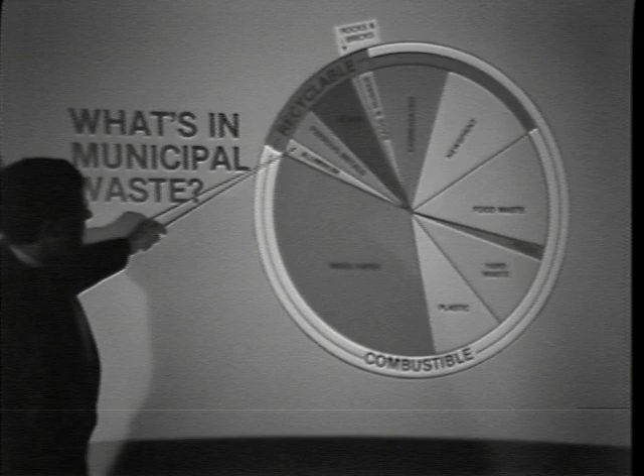Those parts of the waste stream which are recyclable, and those parts of the waste stream which are combustible. Recyclable, including aluminum, ferrous metals, glass, rags and rubbish, corrugated newsprint. These are traditional sources of recycling activities in this state particularly. And the preponderance of the waste stream is combustible.

This represents a sampling that we conducted for a 2-week period at the Edgeboro landfill, documented in our environmental impact statement. The significance of this slide is that it represents basically the same components of waste found throughout the world in other affluent countries. We hear a lot about my garbage is better than yours, yours is different from mine. It's all basically the same.

We find variations in moisture content. For example, Japan has more moist refuse, but at the same time they have more plastic in their refuse, perhaps 10 or 15%. It ranges. This happens to be about 7%, which is what we found in the constituent elements of the Edgeboro municipal waste stream.

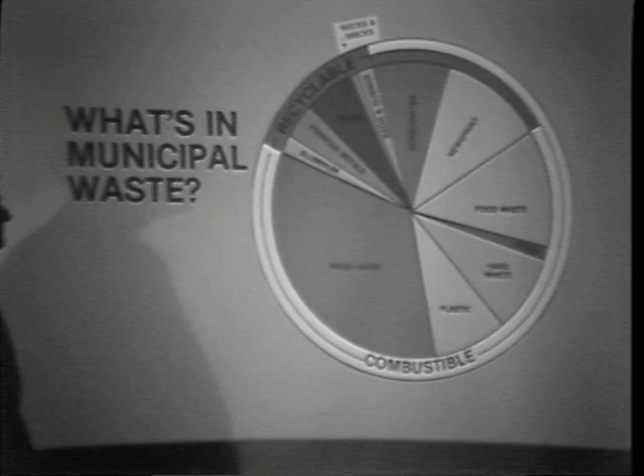Quickly touch upon the fact that the technology we're going to be talking about tonight is not experimental technology. It is widely adopted throughout the world, using the same basic commodity. This will give you an idea of the number of major countries that have adopted resource recovery technology like the one we're proposing for Middlesex County.

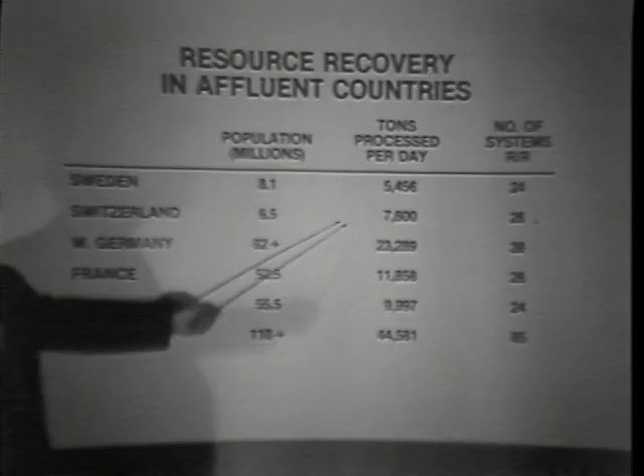Major countries like West Germany, where 23,000 tons per day in 39 plants are being used right now. That's equivalent to all the waste that New York City generates. Japan has 85 plants with a throughput of 44,000 tons per day, or roughly 3 times what the entire state of New Jersey generates per day. So the technology is not something that is untried.

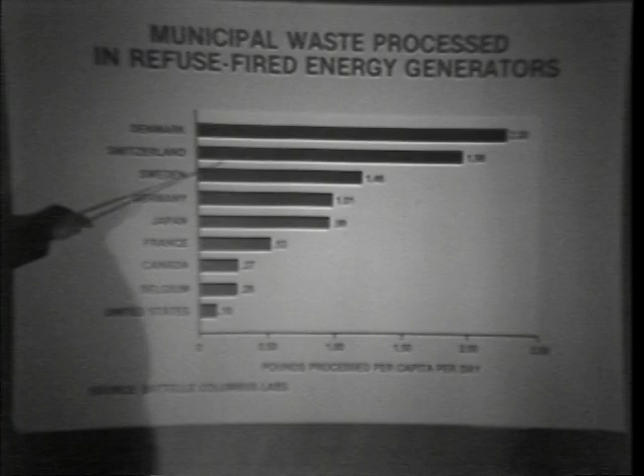This is how that throughput relates to a per capita waste generation. We normally consider a person as generating about 3 to 3.5 pounds of municipal solid waste per day. As you can see, these countries have achieved significant diversions from land disposal through the use of resource recovery technology. You got to get all the way down to the United States, where we're doing about 1/10 of a pound right now.

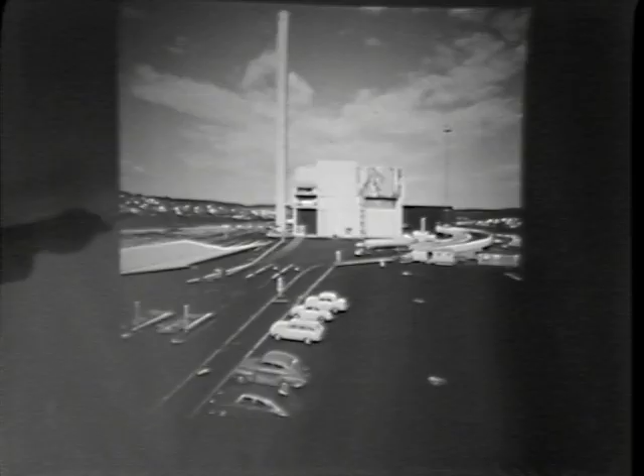I'll quickly go through. This is what the plants look like. This is a Swedish plant in Göteborg with a throughput of about 1,000 tons per day. This is a plant in Bremerhaven, Germany, which uses the latest technology, a scrubber, to perform acid gas control, and it is roughly 1,000 to 1,500 feet from the residential units.

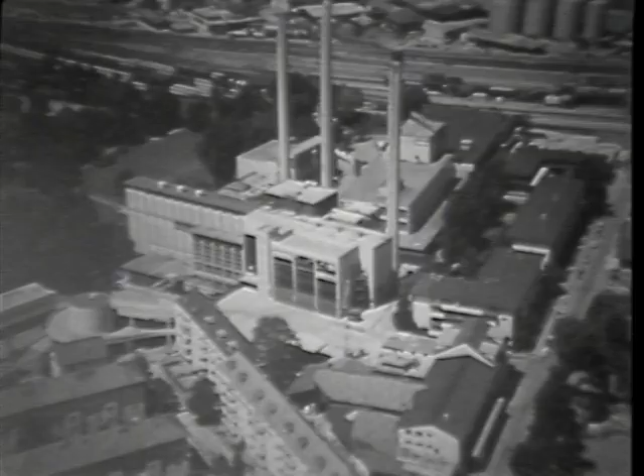A Japanese plant. The first of these plants ever to be built in the world, in Bern, Switzerland, capital of Switzerland, and as you can see, it's close in close confines to residential apartment uses, as well as some single-family townhouses.

The reality, from a worldwide perspective, is that people have recognized in Europe and Japan that we have limited land, that there are environmental concerns to be addressed with land disposal, and unlike us until recently, they are aware of the energy value in municipal solid waste. They have opted for an aggressive program of resource recovery and recycling.

In the United States, same basic parameters. This one is gaining more prominence locally, as landfills are forced to upgrade with environmental improvements and as capacity limitations are reached. We're facing the fact that we have to turn to alternatives.

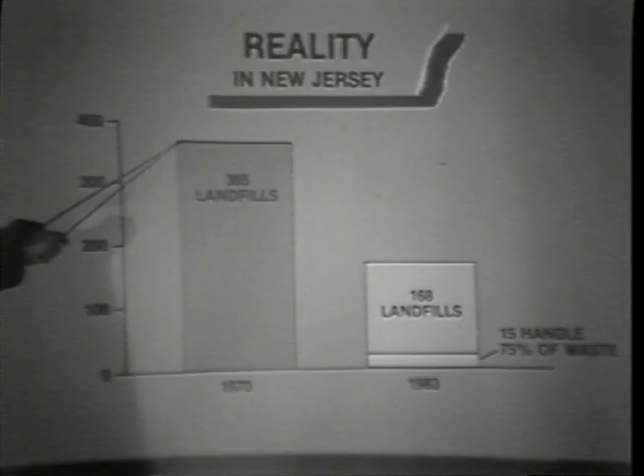This is the reality that faces New Jersey. In 1970, we had 365 landfills. In 1983, we have 168. But the key issue, or the key dimension, is the fact that we have 15 landfills in the state that handle 75% of the waste, and those landfills are rapidly reaching their limits of capacity.

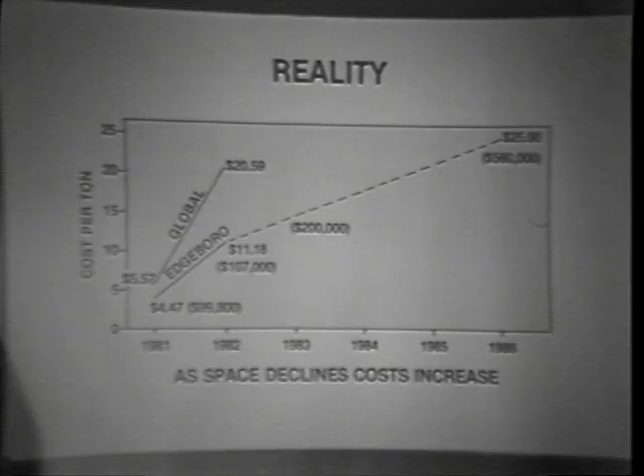This is a reality not many people are aware of, yet it represents a scenario that is not highly improbable. It shows that in 1986, if current trends continue, this county will be faced with the prospect of siting a new 135-acre landfill to satisfy its waste disposal needs to the year 2000. Those of us in Middlesex County tend to feel the luxury of having readily available land disposal. It's going to be here for a long time.

Why worry about it? The fact is that unless new landfills are opened in other counties, or landfills are expanded in the northern part of the state, this county will be without land disposal for its own county-generated household solid waste. There will be no disposal resources in the county by 1986.

What will be required to satisfy county-generated waste through the year 2000 is a plot of land equivalent to about 400 to 500 residential lots, buried about 40 feet deep. With resource recovery, the land requirements are dramatically decreased, in fact, to less than 1/7.

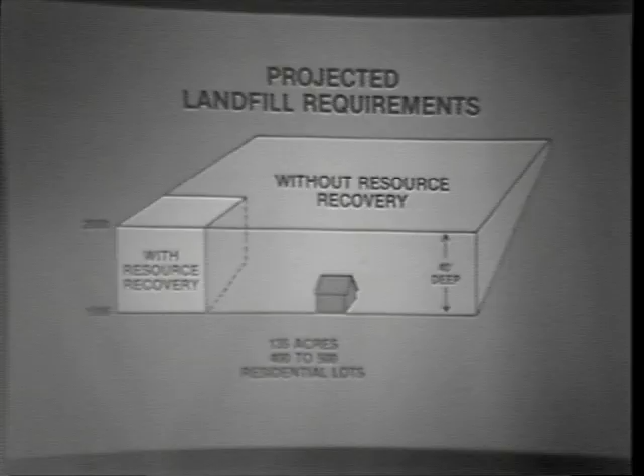The county, facing this prospect and analyzing the various scenarios in terms of waste disposal, the quantities coming in, and the inability of other exporting counties to solve their problems, has opted for a balanced approach to satisfy its own waste disposal needs. It features recycling, resource recovery, and landfill.

Recycling, basically curbside local recycling programs, is to be expanded from a present level of about 1.7% to a goal in 1984 of 5%, with an ultimate goal of recycling 25% of the municipal waste stream by 1990. A very aggressive goal, but this still leaves a significant portion of waste that must find a place for disposal.

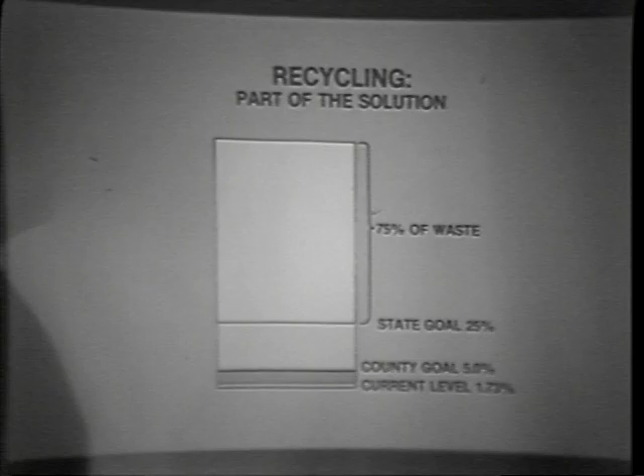The other part of the choice the county has made is resource recovery, for these reasons: first and foremost, bulk waste reduction, energy production, and environmental improvement. Let's look at what we mean by bulk waste reduction.

This is a cubic yard of municipal solid waste that would be carried on a packer truck. In an ordinary landfill, we can compress that through compaction to about 1/3 of its volume. By processing through a resource recovery plant, we reduce it to 1/20th of its volume, that being the ash that requires disposal.

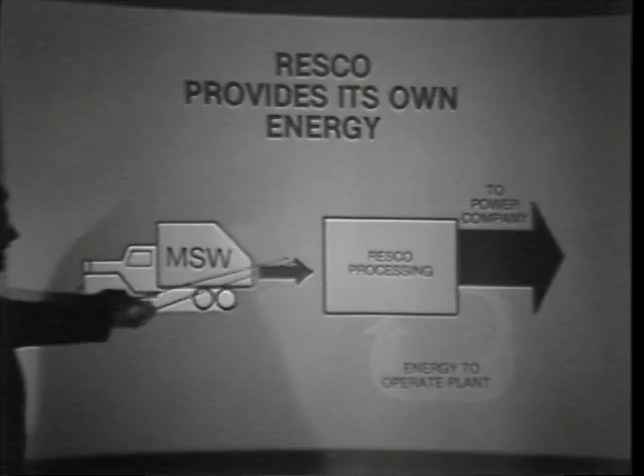We also extract considerable amounts of energy from the organic portion of the municipal solid waste stream. A plant such as proposed for East Brunswick, with 438,000 tons of throughput annually, will generate a gross power of 250 million kilowatt hours, the equivalent of 26 million gallons of oil. Very little of that energy is used for plant consumption.

In opting for resource recovery, there are three basic considerations: siting, technology, and financing. We responded as a company to the county's specifications in all three areas, contained in the county solid waste management plan, which was approved by the state. In terms of siting, the county prescribed an area called a gray area, basically in the central part of the county along the Raritan River, where it was deemed feasible for a resource recovery plant to be sited. Specific siting, however, was left to the project initiator.

Technology choices, again, were made the decision of the private developer. And finally, the financing responsibility, in view of the substantial tax benefits associated with financing these facilities and the benefits that form of financing bestows on the public in terms of tipping fees, was delegated to the private sector. We responded to those three criteria as follows.

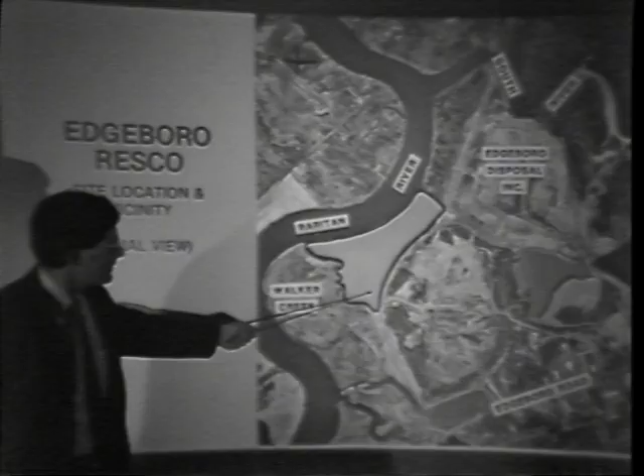We have looked at other technologies. Resource recovery is a generic term; it embraces many technologies. Many have been experimented with, particularly under the sponsorship of the federal government and the Resource Conservation Recovery Act. Many technologies have failed, many have proved unreliable. This technology has a track record of 30 years, and it's been improved over that period. That's why we have selected it for application in this state.

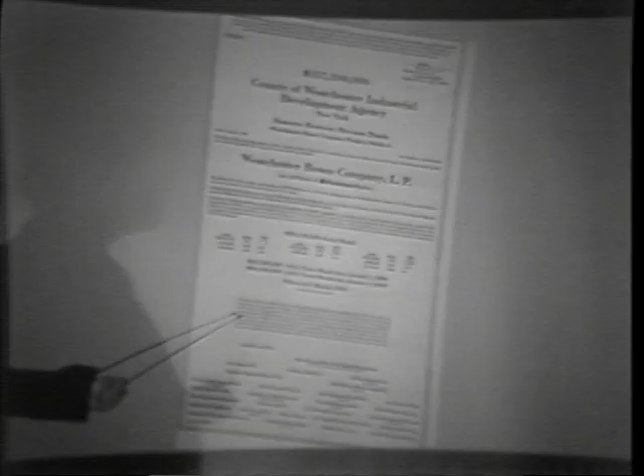I mentioned financing. The county's third decision was that these resource recovery projects are businesses. They're not public works projects, they're businesses, and they should be run as businesses. We have adopted that in our Saugus plant, have run these projects as private businesses, and we have continued that philosophy in Westchester County. That is the offering statement associated with the issuance of $157 million worth of tax-exempt industrial development bonds, which represent about 75% of the capital cost of a project being built in Peekskill, New York.

Wheelabrator Frye is the managing partner through a subsidiary in joint venture with the John Hancock Insurance Company. We both put in equity, we both have made a long-term commitment, and we both are standing behind the design and construction of that plant. It is again 50% larger than the proposed East Brunswick plant, and it will serve the waste disposal needs of Westchester County.

I touched upon Baltimore, where we are dismantling the pyrolysis project. We placed these bonds, $190 million worth of tax-exempt bonds, two weeks ago. That project has been under demolition for about a month and a half now. It will be completed in 1985, and it will serve the waste disposal needs of the city of Baltimore and parts of Baltimore County. We have undertaken the responsibility to design, construct, own, and operate the plant, and in that case have committed over $50 million worth of equity capital to the venture.

So in the past six months, Wheelabrator Frye has committed over $100 million to the construction of resource recovery plants. We have faith in the technology, we have faith in our ability to run these plants and to benefit the communities that they serve.

Which leads me to the final point I'd like to make before turning over the program to our technical consultants: the issue of community benefits.

These are the types of things associated with a privately developed project, and how a RESCO project would benefit a town like East Brunswick. We believe it will provide a substantial rateable, perhaps nearly the largest rateable in the township.

Since the project is basically capital intensive, our costs are fixed up front, we believe that tipping fee stability, unlike what is happening with landfill tipping fees, will be stable. I can cite as an example our Saugus plant, where in 1975 we opened up with a tipping fee of $13 a ton, and we currently charge municipal customers, according to a contract,

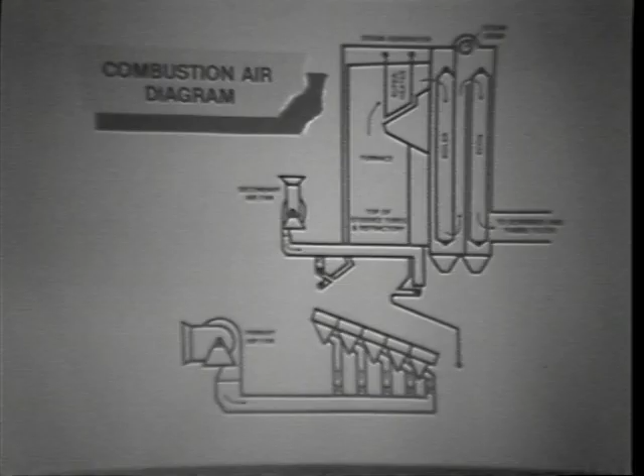I'd like to now concentrate on the processing side of our plant. Other technologies have used shredding and pyrolysis. The only processing we do is to pick it up out of that pit and drop it into the furnace. We do no processing other than to remove bulk, non-combustible material that's obvious inside the pit, and we take that out. I'd like to spend some time on both the lower part.

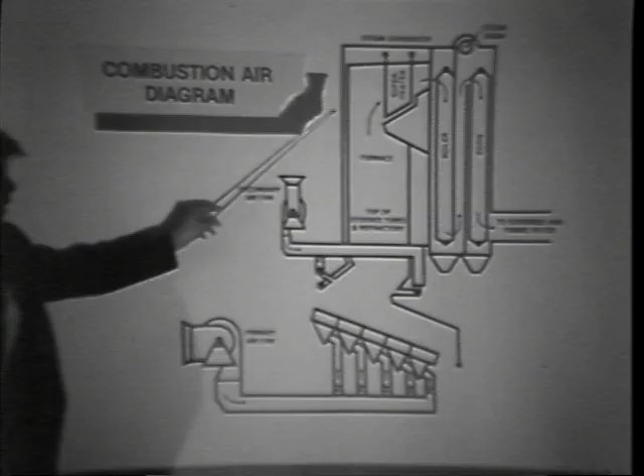This object down here is called a stoker or a grate, which controls the flow of refuse into the furnace. And this is basically the boiler, composed of both a furnace and heat transfer sections.

Combustion air would come through these hoppers underneath the grate to provide sufficient oxygen for the burning of the refuse. In the first zone, we call it the drying zone, the raw refuse is first exposed to the furnace, and any residual moisture is driven off and combustion is initiated.

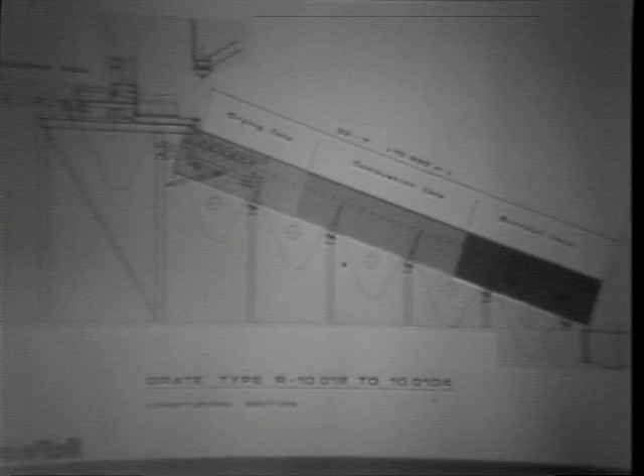The last section, the burnout zone, is basically not too exciting. There's some stubborn material in there that needs a longer period of time to burn, some wood, some tree stumps, logs, that type of stuff. Once it passes through that zone, it is discharged off the end of the grate, any of the non-combustible portion, into the ash quench system. Typically, it takes 45 minutes to an hour for refuse to travel from the beginning to the end.

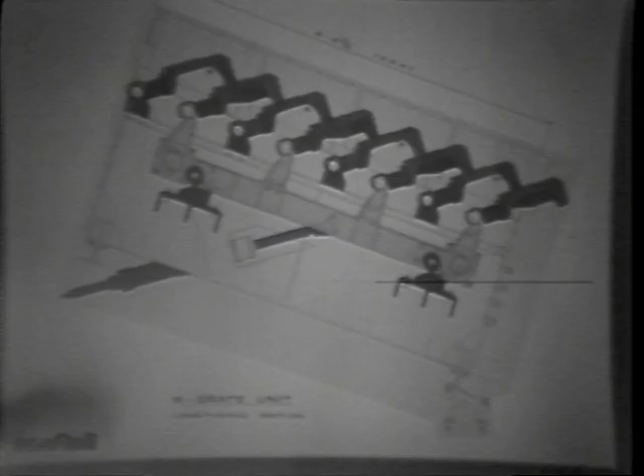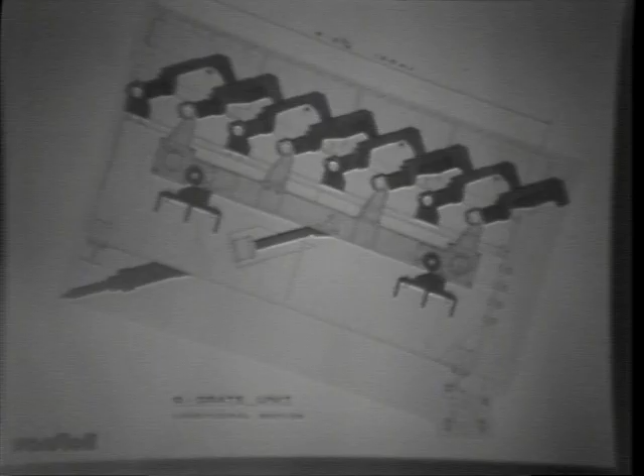Not to bore you with details, but this is a close-up of the grate to give you a better idea of just what's taking place there. The grate is comprised of alternating rows of stationary and reciprocating grate blocks. This chassis drives every other row, and essentially this block would move back and forth, slowly agitating and moving the refuse down the grate. It provides a very uniform movement and control over the fuel and the air through the grate to provide for the best way we know to control combustion in a very heterogeneous material.

This is a close-up of the boiler itself. The grate, which we just went over, is the lower part here, which shows the hoppers and the grate. And to really speak about the boiler, you have to look at it in two ways. One is the combustion side, and the other is the water side, the steam side.

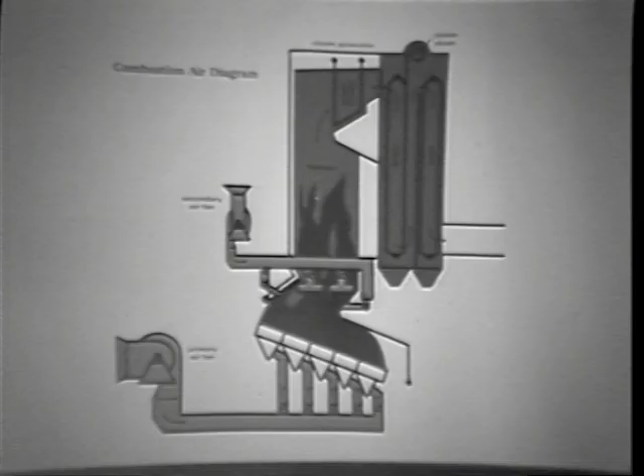To talk about combustion, you really have to go back to the three fundamental principles of combustion. They're called the 3 T's: time, temperature, and turbulence. All those have a special application in burning refuse. Time - you need sufficient time in a furnace to be sure that all the material is burned. You've got to give time to the combustible portion to mix with the oxygen so that everything is burned and combustion is complete. We do this in several ways.

Basically, we initiate combustion on the grate by providing a great deal of air underneath the refuse. This air, again, is taken from the pit. Odors and dust are sucked in and injected into the furnace for the initial combustion. As the combustion begins and the material heats up, a great deal of gases are given off. Those gases have to be burned. A bulk of the combustion then takes place above the grate.

To accommodate this, we have a secondary air system, a system of very unique nozzles and arches that provide the turbulence necessary to complete combustion. The gases are induced into a very violent motion, a recirculation of gases to be sure that oxygen is available to any material that has to be burned.

And finally, the great deal of gas and heat released in this area essentially forms a constant ball of fire that sits above the grate at all times. This radiant beam of heat serves to roast and maintain complete combustion of the material in the grate, as well as to combust any of the gases given off during the combustion process.

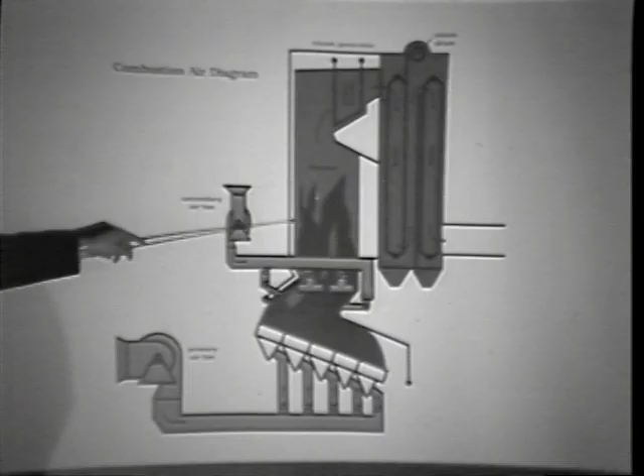The fire is basically complete by the time it leaves the furnace, and the heat absorbed in the furnace and the various sections inside the tubes is then used to generate the steam.

Briefly, the water enters the boiler in the cold side, is sent up to the steam drum, and by proximity to the heat through tubes, the water is turned into steam. The steam is then sent to the turbine generator for generation of electricity.

At one time, incinerators were very common in the United States. Their basic function was strictly to reduce the volume of the material entering the incinerator. We have a much bigger role in that we're trying to extract every bit of heat we can, to recover it and turn that heat into steam for generation of electricity.

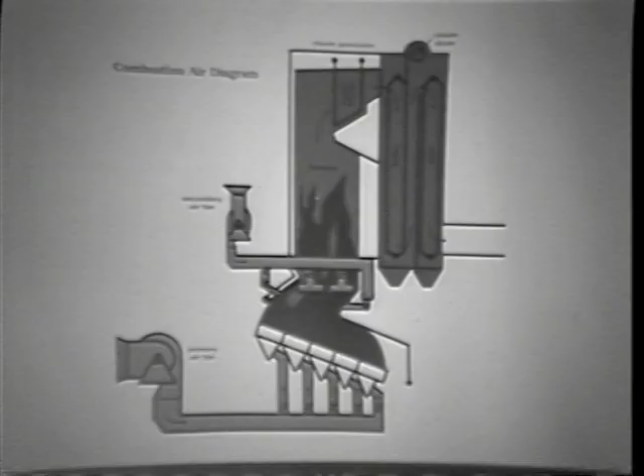Finally, in a little more detail, as the gases leave the boiler, they now have to be cleaned up in the air pollution control side of the system.

As it passes into the spray dryer absorber, a mixture of water and soda ash is injected into the flue gas stream. This serves to absorb any of the acid gases contained in the flue gas stream, and the reaction products, as well as any entrained particulate matter inside the flue gas from combustion, is then conveyed to the fabric filter.

We have representatives from our Air Pollution Control Division here, and they'll go into great detail over this particular system we've applied here to give you a better feel of how it works.

Essentially, we have 62.5 tons per hour entering the furnace, and roughly 20%, or 13 tons per hour, is non-combustible and falls off the bottom part of the grate. A smaller amount, essentially 3 tons per hour, results from the fly ash and reaction products in the spray dryer, and is then all combined for ultimate removal to the landfill in trucks.

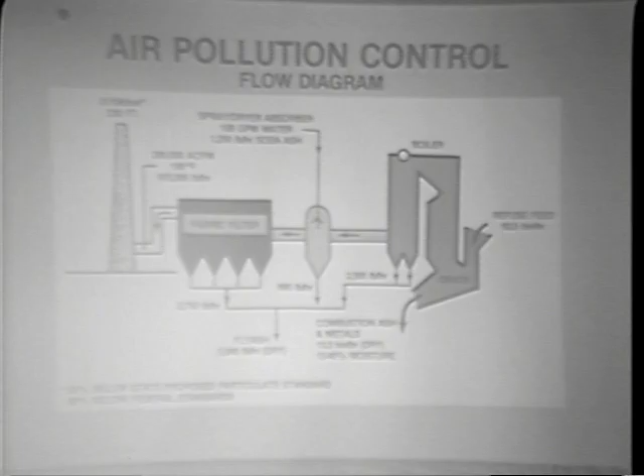I think that's it. Mr. Ferrante, I think this is a good time to take just a 1 or 2 minute break while the videotape is changed. Want to do that now?

All right, would you be seated, please, so that we can continue with the presentation? We'd like to continue, please. Would you be seated? There's something wrong with the mic. You can have my pencil if you like. Thank you. Get him up here. Okay.

As I mentioned at the outset, the commitment that we make to resource recovery is not just to design and finance it, but to operate it, and operate it for a long period of time.

I always have a great deal of pleasure introducing Dan Madigan, because Dan has been with the RESCO project in Saugus since its groundbreaking. He has a wide background in industrial power plant operation and came to RESCO to tame that beast. He's been with us since 1973. He's the key figure in the success of our Saugus operation, and I thought he could come down here and share some of his experiences briefly in what it's like to operate a refuse plant and the kinds of commitments necessary to make it work. Dan?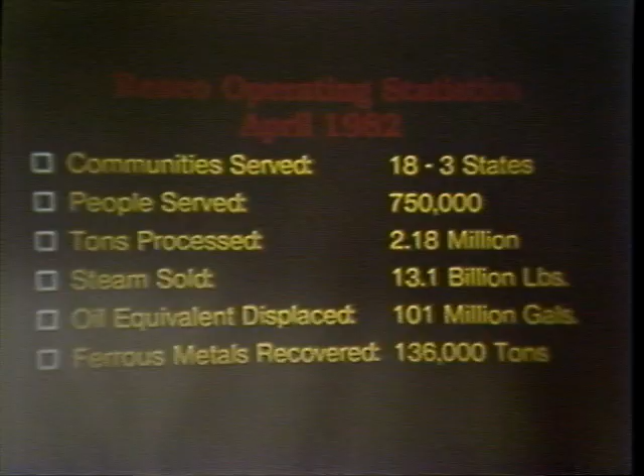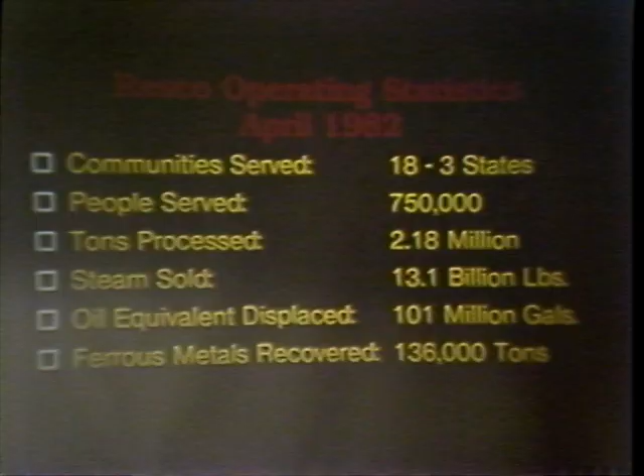These figures are old. The 2.5 million is as of January 1st this year. Steam sold is now 15.2 billion pounds to the customer. Oil equivalent, that's in gallons, but in barrels that would be about 2.75 million. Ferrous metals, that is the actual number, and it hasn't changed very much, to be perfectly honest with you, because the metal market has been pretty bad in our present economy. Very little movement in the last 18 months, only marginal sales in that area.

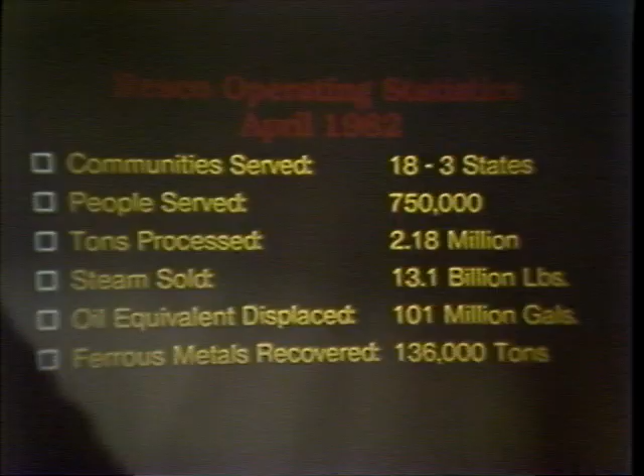In talking about the people in the plant, I'd also like to add that what Wheelabrator has, and what we have as a company, is 8 years of operating experience with our own name on the front door. We were responsible for the design, the construction, and the operation. So therefore, we can't say, well, we did a good job building the place, they just didn't know how to run it. If it's not run properly, it's our fault, no one else's. And I think we can offer that, and with that, we can offer you experienced people, people that are available, that understand the business, and will make great contributions to any future endeavors that we undertake.

Right to the point that every one of our employees is involved on a regular basis in technical updates, month-to-month operating needs. Any inputs that any employee has, regardless of his position in the company, are asked for, recorded, documented, and his assistance is also used in the implementation of things that we accept as changes to the design and improvements in efficiency.

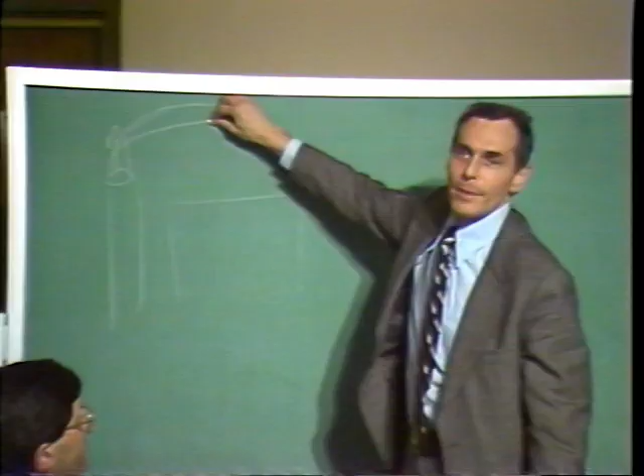In addition, if you have a situation where there's a building near the plume, as is the case here, this model also describes the effect of what we call building downwash, where turbulent air currents around the building will cause parts of the plume possibly to be sucked downward. So this is a very sophisticated model.

Before I discuss the results of the modeling, I just want to briefly explain the effects of the three control technologies that we considered. Some of these have been touched on already, but I just want to put it in perspective.

The purpose of the precipitator or the fabric filter is to essentially eliminate the emission of particles from the stack. These are the kinds of particles that would cause a plume to appear brown or black when it comes out of the stack. This kind of thing is definitely illegal in New Jersey, and you just don't see plumes like that around anymore.

All of the scenarios that we looked at employ either electrostatic precipitators or fabric filters. The purpose of the wet scrubber or spray dryer absorber is to reduce the emission of acid gases, principally hydrogen chloride, hydrogen fluoride, and various oxides of sulfur.

Both types of scrubbers, the wet scrubber and the spray dryer absorber, produce about the same amount of scrubbing action. They reduce the hydrogen chloride and hydrogen fluoride emissions by a factor of 10, and they reduce the oxides of sulfur emissions by a factor of about 3.33. The emissions of other pollutants are essentially unaffected by the scrubbers. The scrubbers have other effects, though, besides cutting out the acid gases.

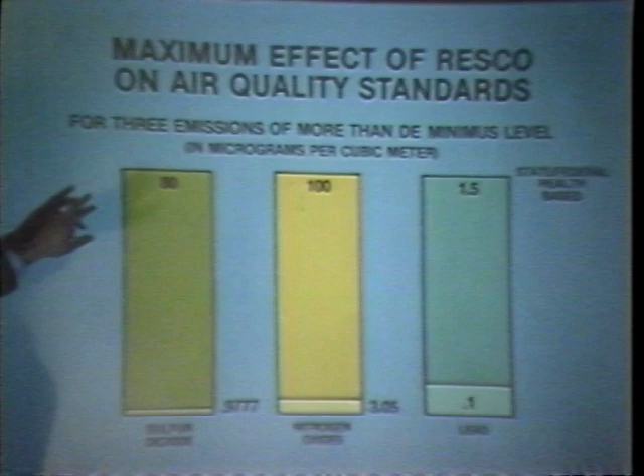The three most significant emissions in terms of their impact on the standards are sulfur dioxide, oxides of nitrogen, and lead. This slide graphically shows how the concentrations would relate to the standards. These would be the maximum ground level concentrations that would be produced by the RESCO plant, compared against the standards. I emphasize these are the maximum ground level concentrations that would be observed anywhere — everywhere else the concentrations would be even lower. The federal and state standards are couched in different terms for different pollutants: for sulfur dioxide and nitrogen oxides we look at an annual standard, and for lead we look at a 3-month standard.

The emissions of other pollutants and their ground level concentrations, which I haven't mentioned here, would be even less significant than these in terms of impact — these are the 3 most significant ones. To summarize, based on the BACT analysis, we've ascertained that the facility operated with a 230-foot stack in conjunction with a spray dryer absorber and fabric filter would operate well within all existing health-based pollutant standards. Thank you.

To complement Professor Reese's examination of the effect that the proposed facility would have on air quality, we asked other technical advisors to look at other environmental issues associated with the plant. We asked Ware & Engineering, who coordinated the environmental impact effort, to look at the site geology, water consumption, ash disposal, traffic, and the use of the river as a condenser cooling water medium. I want to introduce from Ware & Engineering Dennis Fenn, their Senior Vice President, who was in charge of that effort. Dennis?

Thank you, Joe. As was previously stated, our role in the project was to focus on the preparation and completion of the environmental impact statement. This involved not only our in-house studies on various aspects of the project, but working very closely with the technical engineering staff at Wheelabrator Frye, as well as with Professor Reese relative to the air pollution control technologies.

First, relative to the siting of the facility on the Edgeboro property, we had several criteria in mind. Here we see a geologic cross-section through the facility area. This cut runs north and south, perpendicular to the river, with the so-called Clancy's Island to the left on the slide, which is a higher topographical area, into a lower topography area, which is virgin ground, back up onto previously landfilled area, and beyond the edge of the slide would be the Raritan River.

The physical plant location is in this general area on the lower topo existing ground. Basically, of key concern in orienting the plant here was distance to a bedrock formation which would serve as a bearing soil for the foundations, because it is a major structure, as well as having heavy equipment.

Secondarily, considering a potential effect on groundwaters, the physical plant itself really does not have any effect on groundwaters. As was previously described by Mark Hepp, it is literally an industrial plant. The surrounding areas are paved. All the handling and manipulation of refuse itself occurs within the confines of a building, on top of structural concrete and sealed tipping floors and pits. So there's really no leachate potential from the physical plant itself.

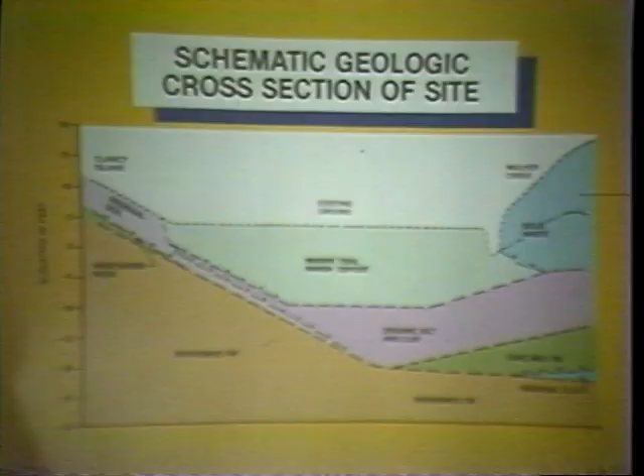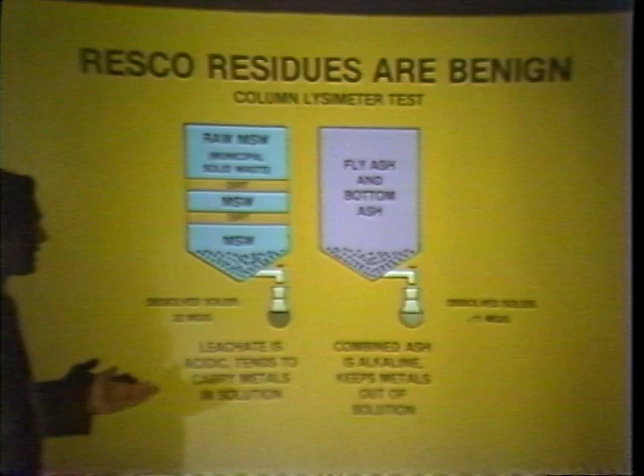Relative to the potential leachates from the residue of the Resco plant itself, this slide depicts a comparison between a leachate from a raw municipal solid waste as it would be disposed of in a sanitary landfill, and a leachate from an ash from a Resco facility. As many of you are probably familiar, raw municipal landfill waste, by its very nature and by the nature of a landfill operation, produces leachate. It's a fact of life. That's the motive for a lot of the environmental regulations landfills are facing today. It's been well documented in the literature that landfill leachates tend to be acidic and tend to carry metals and other contaminants in solution.

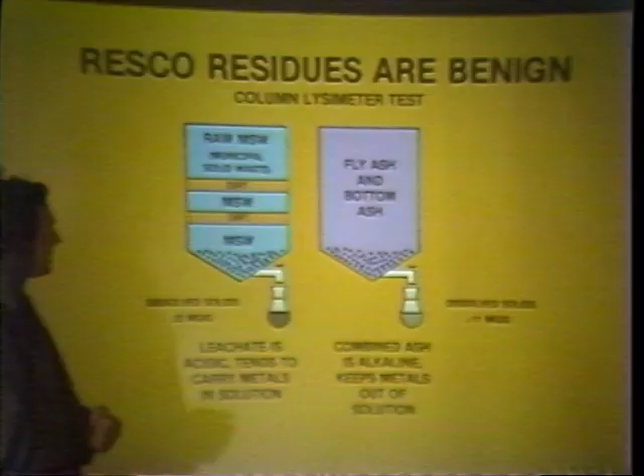In the case of the Edgeboro Sanitary Landfill, they are controlling that with their leachate collection system. The ash from the Resco facility is typically alkaline, and in the case of the proposed Edgeboro plant, it will be even more alkaline with the use of the soda ash spray dryer air pollution control equipment, which raises the alkalinity, thereby tending to keep metals and other contaminants in a less soluble condition. Although it does create a leachate, it's a less harmful leachate than you would find in a raw municipal solid waste leachate. The conclusion being that the leachate control system in the Edgeboro Sanitary Landfill would be more than adequate for our leachate.

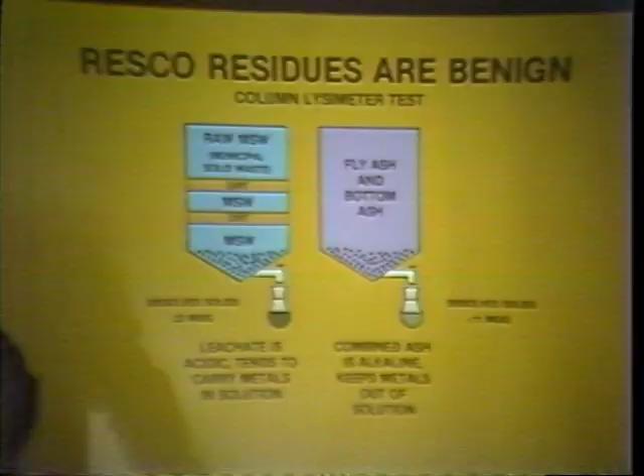What about other water requirements at the facility? The process requires other waters besides the Raritan River cooling water system, which will be described in a little more detail in a moment.

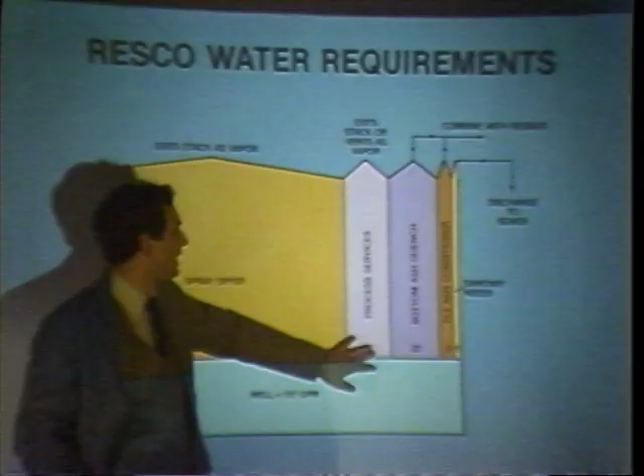These waters include the water necessary for the operation of the spray dryer itself, which represents, as you can see on this graph, a large portion of these other process waters, roughly 70%. It will use roughly in the neighborhood of 108 gallons per minute of water. The discharge from this is basically through the stack as vapor. There are other less significant water uses in terms of process services, such as boiler blowdown and other miscellaneous uses in the plant, representing about 22 gallons per minute, also exiting the stack as vapor.

The bottom ash quench waters exit the plant basically in the residue. There are also some very minor uses for fly ash conditioner and the basic sanitary needs of the employees in the facility, which would be discharged to the municipal sewer system. Those represent roughly a total of 4 gallons per minute, a very small amount. This total process water need would reflect approximately 157 gallons per minute, or about 220,000 gallons per day, and would be drawn from the on-site well at the Edgeboro landfill, which has a permitted capacity of well over 7 times that amount.

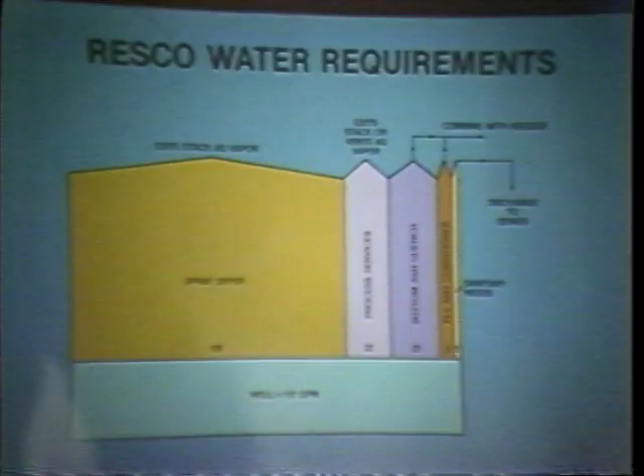Now we want to get into the other two impacts, that being traffic, focusing on the analysis we conducted at the intersection of Edgeboro Road with Route 18 and Old Bridge Turnpike, and the thermal water diffusion system in the Raritan River used for cooling the condenser. I'd like to introduce Gary McEntee from our office, who has served as senior scientist and manager of those studies, for a brief explanation of the same.

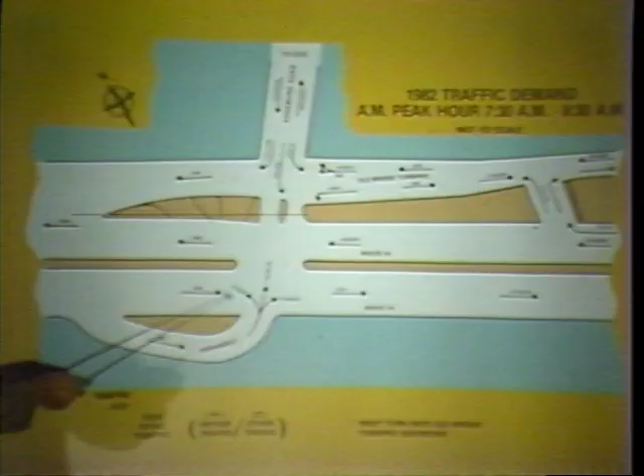What is existing as far as roadway conditions? First of all, we look at roadway geometrics, measuring the size of the various access points to the facility. The other thing we want to look at is existing traffic along that roadway system. In doing that, we undergo a technical study of the various turning movements through each of these access alternatives to the facility, locating the turning movements of other vehicles through this intersection. The first one would be cars, refuse vehicles, and then trucks in general.

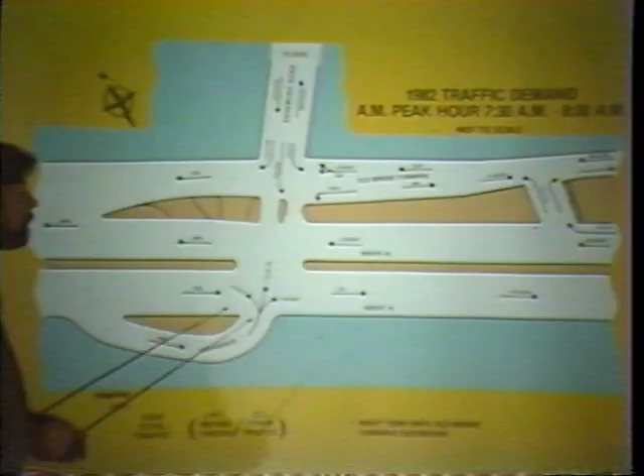Once that has been completed, we look for the peak hour that vehicles will be going through this intersection. In determining the peak hour, we can then do a capacity analysis. In looking at our study, we've determined that the peak hour traffic flow through this intersection is between 7:30 and 8:30 in the morning. There's also a corresponding peak hour in the evening between 4:45 and 5:45. However, for our analysis of this facility, we're mostly concerned with the AM peak hour.

Looking at this peak hour, through this intersection there are 4,800 vehicles that actually move through between Edgeboro Road and Route 18. Of those 4,800 vehicles, approximately 93 are refuse vehicles presently going into the site. We must remember that of those 93 vehicles, there are actually only approximately 47 vehicles being counted, but we're counting vehicles entering the facility as well as exiting. That 93 vehicle trips represents only 2% of the total traffic moving through this intersection.

So during the peak hour, which is the most critical hour in assessing safety analysis and capacity of an intersection, we only have 2% of that vehicle traffic being refuse trucks right now. This low amount of refuse trucks coming through the intersection is quite typical of solid waste facilities in general.

Basically, at any solid waste facility, whether it's a landfill or resource recovery facility, you have three peak hours of delivery of refuse to the facility. We have a very early morning peak between 6 and 7 o'clock in the morning, a late morning peak between 10:30 and 11:30, and then an early afternoon peak probably between 1:30 and 3 o'clock.

This roadway system was evaluated in 1985 by growing up projected traffic along this roadway. Taking those numbers, we have superimposed the amount of refuse vehicles that enter the facility. We have the same type of distribution, where refuse vehicles will be entering early in the morning, again later in the morning, and then early afternoon, showing the same type of pattern.

This shows that the actual refuse vehicles entering the facility do not have a major impact on peak hour turning movements. The other study of much concern that was addressed was the cooling water study, which we'll turn to now.

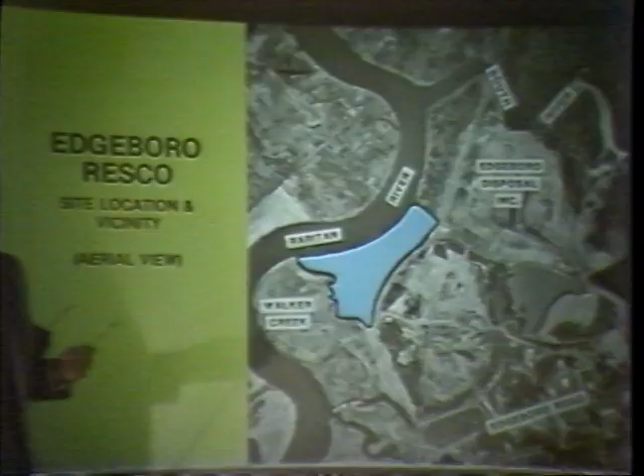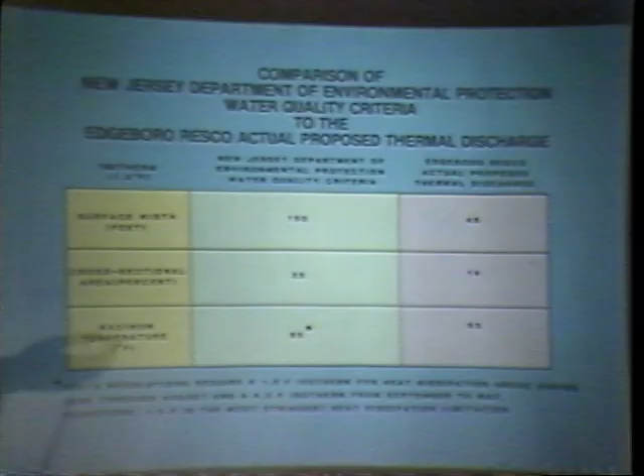Once looking at a once-through cooling system, one major concern is evaluating the criteria set forth by the New Jersey Department of Environmental Protection. Before the once-through cooling system was decided upon, we looked at various alternatives for cooling water use. In the earlier submission, we looked at four different alternatives: a cooling tower, spray cooling, a cooling pond, and once-through cooling. Based on comments from the county and the state, once-through cooling was the most feasible, both economically and environmentally.

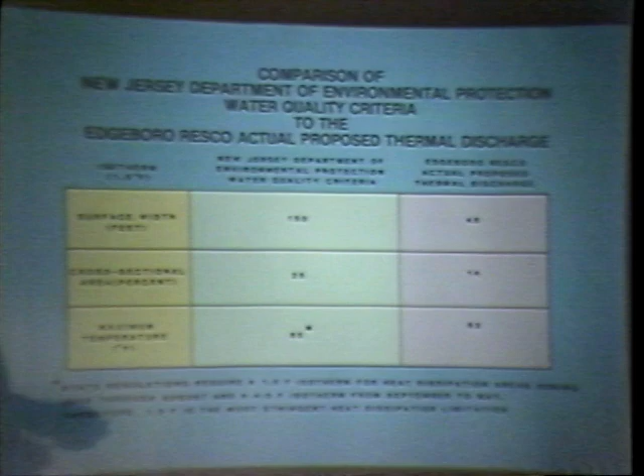Once we decided to use once-through cooling, we met with the New Jersey Department of Environmental Protection to review their regulations and the type of model we were going to use to assess this potential environmental concern, as well as to ask for input on data and other facilities discharging into the waterways. Sitting with them and presenting our model, they felt confident it would give them the results they were looking for and provide an adequate evaluation of the concerns.

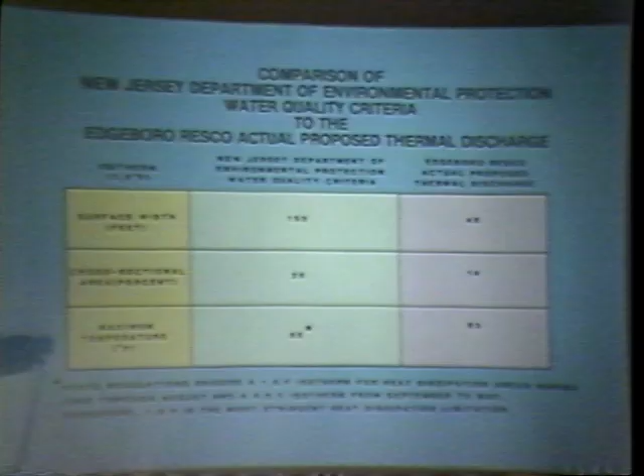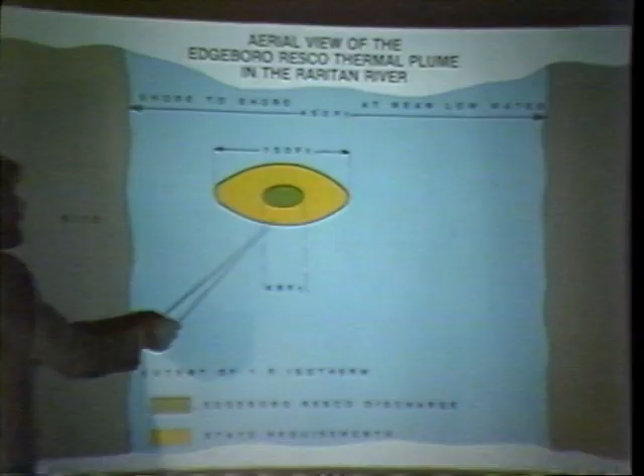New Jersey has regulations limiting what's referred to as the mixing zone for thermal discharges. The mixing zone is the area the state has set up, 150 feet across, where mixing of the discharged water is allowed. At no point can the water outside that zone be increased more than 1.5 degrees Fahrenheit. It's a fairly stringent regulation.

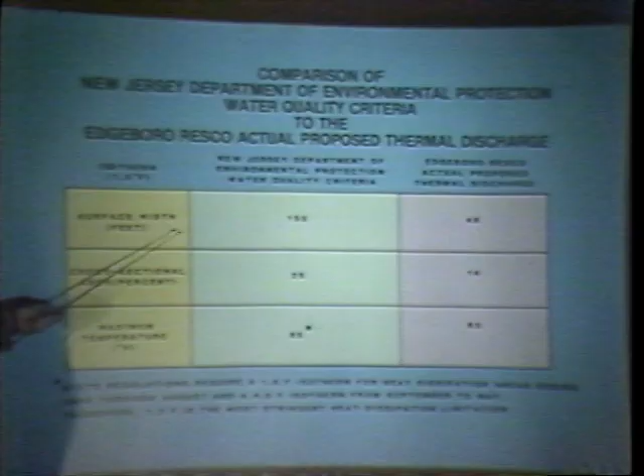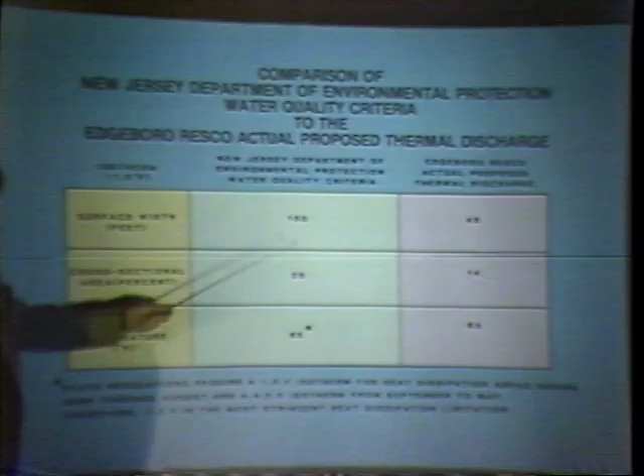In looking at these criteria, we conducted a thorough modeling analysis. This is the criteria the state has set to ensure no impact upon aquatic organisms in the river from a thermal discharge. The major criteria: surface width, 150 feet allowed; our study results show 48 feet, well below the regulation. The cross-sectional area criteria would allow 25% of the river's cross-sectional area; our studies show 14%. Both criteria are very important in assessing potential impacts to fish, especially migratory fish.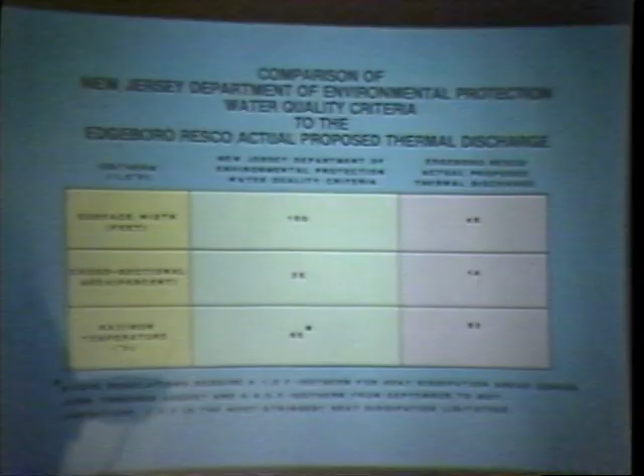What must be maintained within the river is a zone of passage, so migratory fish can pass through without being impeded by the thermal discharge. The final criteria is that waters outside the mixing zone shall not exceed 85 degrees at any time. Our calculations show the maximum during the hottest summer days would be 83 degrees.

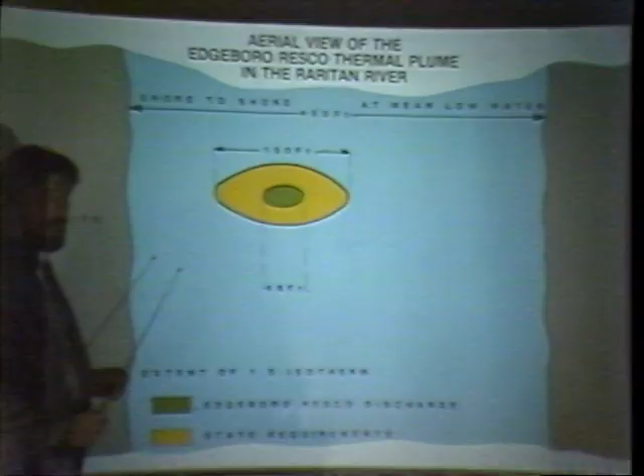I think we can really see the comparison. Taking an aerial view of our discharge, the state-regulated mixing zone is 150 feet. To picture this in the river, from shore to shore at mean low water is 450 feet, so the 150 feet allowed is one-third of that distance across. Our calculations show well below that, at 48 feet.

In summarizing our diffuser study and meeting with the state, we feel that by falling so far below the discharge requirements, this discharge will not impede any movement of fish within the river, nor have any serious impact on other aquatic organisms.

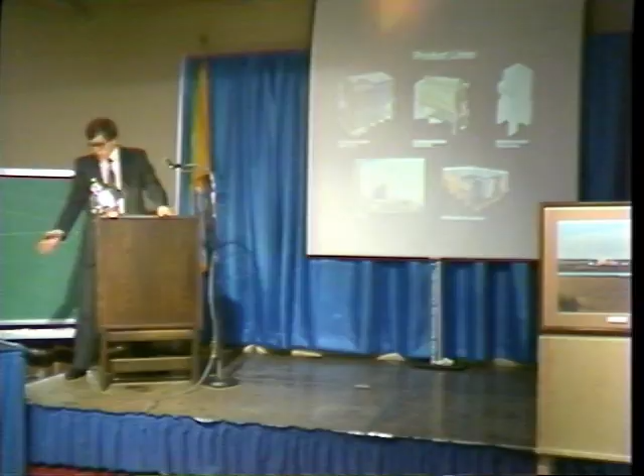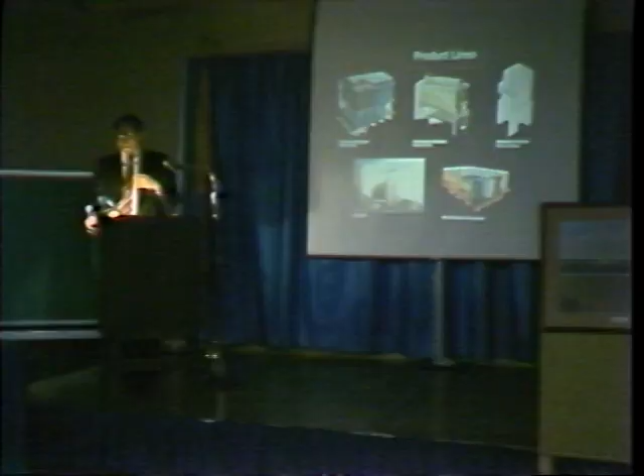Most of the information you heard has been specific to the project in terms of details and numbers. I thought I might talk a bit about the evaluation of the equipment and why the choice of a spray dryer fabric filter is particularly well suited to the requirements needed at the proposed Edgeboro facility.

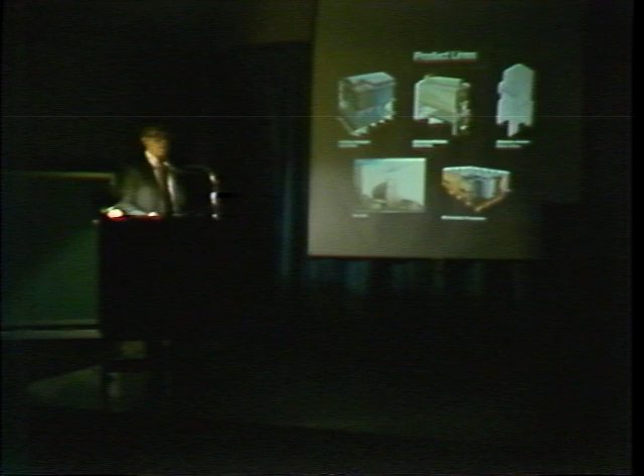Wheelabrator as an organization has a number of divisions involved in air pollution control, some dealing with wet flue gas desulfurization and wet gaseous cleanup systems for fossil fuel fired utility and industrial boilers. The Air Pollution Control Division I'm involved with is primarily focused on a couple different types of particulate control: ash control, as well as the dry scrubbing system mentioned as part of the design. There are a variety of fabric filters that can be chosen, as well as the electrostatic precipitator mentioned earlier, and most germane here, the dry flue gas desulfurization system.

Wheelabrator's experience in dry scrubbing dates back to the late 60s, where we looked at a fabric filter in combination with a reagent to provide absorption of various gaseous species. But most importantly, in the mid-70s, work on the two-stage SO2 and HCl removal studies involved gaseous emission removal both in the spray dryer and fabric filter, as well as particulate removal in the fabric filter.

We're involved in 4 applications of systems of this type, ranging in size up to 2 million CFM, approximately 10 times the size of each system we'd be seeing here at Edgeboro. The types of additive and level of activity and operating experience on some of these go back to January 1980 on an industrial application and March '81 on a large utility installation.

In its simplest form, the system has 3 basic parts. One is additive preparation, in this case the storage and dissolution of a soda ash solution - soda ash being sodium carbonate, not unlike sodium bicarbonate baking soda. The second part is the spray dryer, where the gas is brought into contact with the solution of soda ash and water. This provides for absorption of the HCl and SO2 by the liquid droplets with the additive, which subsequently react and neutralize with them.

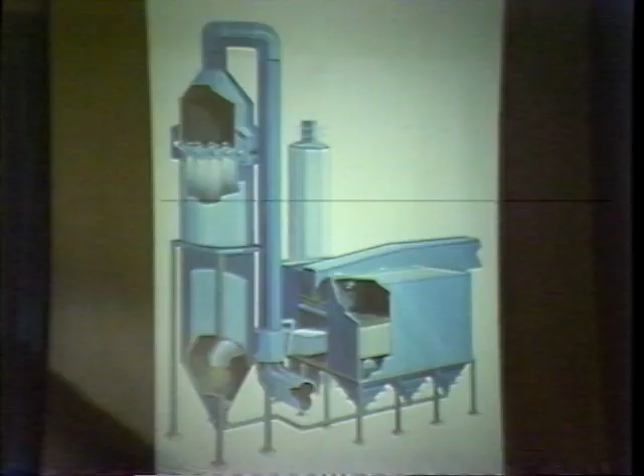Another thing worth mentioning is that the technology of spray drying itself has actually been around for quite a number of years. In fact, spray dryers have been used for some 50 years for drying pharmaceuticals, foodstuffs, and a host of other chemical and processed materials.

What we've done here is to add a material to it that reacts with the gaseous species that we wish to remove.

Wheelabrator is fortunate also in that regard, with two divisions: Nichols Research and Engineering, located in Belle Mead, New Jersey, has over 100 installations of generic spray drying systems, as well as the Swenson division of Wheelabrator, which has some 120 applications of pressurized nozzle dryers. So the technology is there. The experience we've had in dry FGD and the other background is what gives us confidence in the design.

In a little more detail, the spray dryer itself is a vessel with perhaps 10 or 12 nozzles that atomize the solution of material that will serve to remove the gaseous constituents.

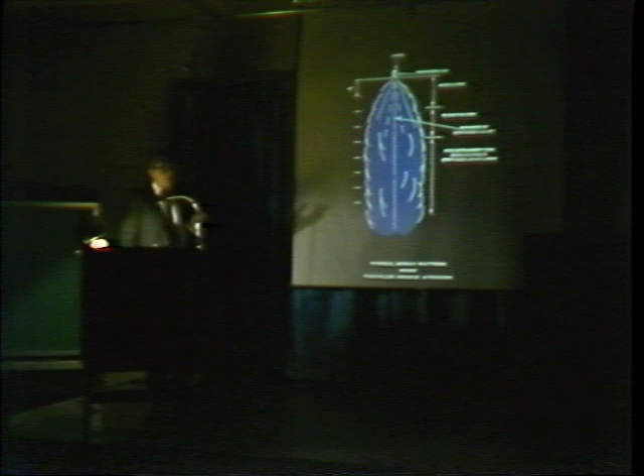The liquid is added with compressed air. What this does is create a finely divided cloud of spray droplets, which enhances the removal efficiency.

This shows one of several nozzles that would be in the spray dryer, and we're contacting the liquid and gas by providing coverage of the plan area so that the gas flows through the spray pattern, as well as the pumping action which occurs as the gas is drawn down into the spray pattern itself.

What we've chosen, however, is the two-fluid nozzle dryer, which, as I mentioned, we have one system in operation and the other just starting into the design phases. These achieve comparable performances. This is the type one would see in a large utility application where, for technical and economic reasons, you can get more energy-efficient atomization in the multi-million CFM range using this approach.

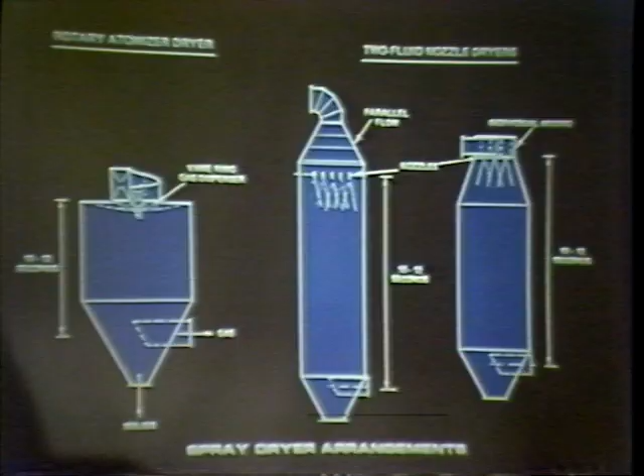Here we're taking an approach of an incredibly simple system. It's a nozzle not unlike your shower head. It has no moving parts. The nozzles can be inspected and removed while the unit is in operation. What this means is that you have overall greater reliability and maintainability of the system, which speaks to the fact that you have even greater assurance of maintaining your emission requirements.

The other major area is the fabric filter, as it provides additional gaseous pollutant removal along with particulate removal. The way a fabric filter works is not unlike the analogy of a large vacuum cleaner. We have a bag made of cloth through which the particulate-laden flue gas passes. As the gas passes through the cloth, the particulate matter is filtered out. In its simplest form, that's what it is.

But like anything else, there are a number of subtle variations, basically in the type of cleaning method itself. There are two predominant types suitable for this application. Again, we're talking about equipment that has been around for 70-some years. One is referred to as reverse air, and the other, the type we've proposed, is shake and deflate.

They differ in the manner used to remove entrained material from the fabric filter itself. It's only half the job to collect it; the other half is to transport it out of the system. The advantage that shake and deflate has is that instead of just blowing gas back through the bag to force the collected material off the filter, it blows a small amount of gas back through the bag to relax it, then provides a gentle mechanical shaking action to the bag, which causes waveforms to ripple down throughout the length of the bag, providing uniform and complete removal of the collected material.

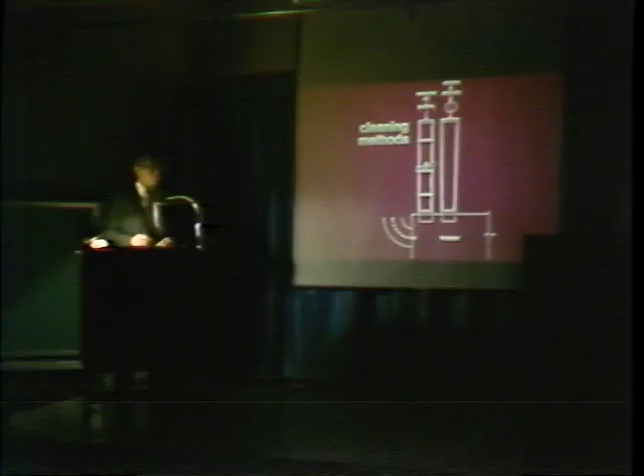May I stop you right there while we do some work on the video system? Sure. And would you please remain seated? This will just take a minute to change over.

One final point on collection and control using a fabric filter is that it's a multi-compartment installation. During the cleaning cycle, we remove that compartment from active service so there's no chance of re-entraining the particulate matter already collected. This shows 2 of what would be 8 compartments for a unit the size of Edgeboro.

This first compartment shows the fabric filter in operation. Dirty gas comes in through the inlet plenum, turns where some of the larger particles fall out, passes up through the fabric filter cloth, which filters out the particulate. The clean gas then goes on to the outlet plenum and onto the fan and stack.

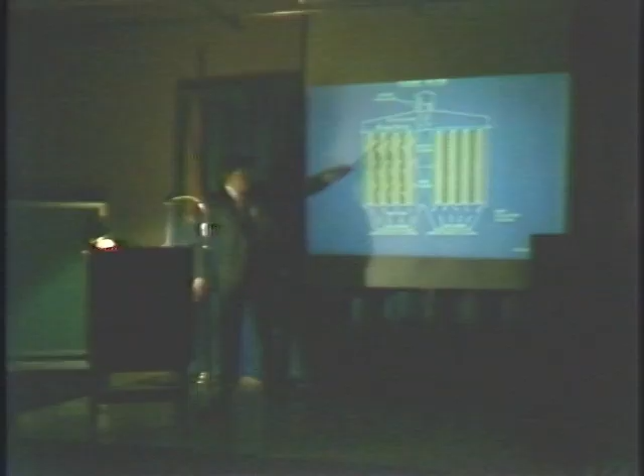When it's time to clean a unit, initiated by a combination of pressure drop across the bag house and backed up by a timing cycle, the dampers close and isolate this compartment, meaning no gas flow goes through it. We then go through the cleaning cycle described before: a gentle amount of reverse air to relax the bags, then a mechanical shaking action to provide uniform removal of the filter cake.

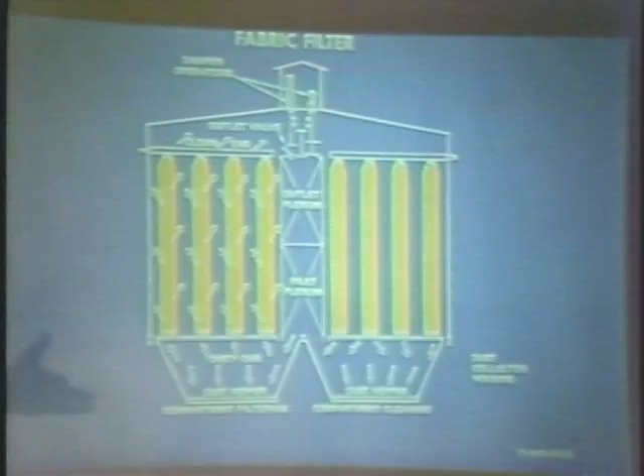The system was designed so that even though it has 8 modules, it would normally function with 7 in service, allowing one to be offline for cleaning. In fact, we've gone even further, sizing the system so we can have a module offline for continuous cleaning if required, as well as a module offline for maintenance. As with the spray dryer, these 8 compartments are maintainable online—you isolate it, open the door to provide ventilation and cooling, then go in and inspect or repair whatever work might be needed.

As you can see, the modules are generously sized with walkways and spaces so there's room to go in and individually change any given bag that might have a hole or be a problem.

I might also mention that because we're looking at very low particulate loadings of 0.15, the system is primarily monitored with an opacity meter. Just as we have SO2 meters to monitor SO2 and HCl, we have opacity meters to monitor particulate matter. Opacity is a measure of light reflectance, and should a bag come off, there would be a jump in the particulate loading, identifying that repair, maintenance, or inspection is needed.

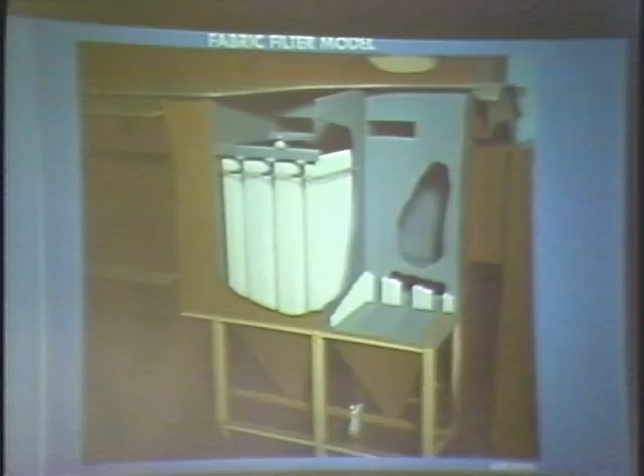That concluded what I wanted to talk about on the general side of the equipment.

All right, thank you. First of all, before we go any further, can you hear me? Yes.

Good. Thank you for your patience, and thank you gentlemen for your presentation. Since the presentation took a lot longer than I expected, I'm going to depart from our planned procedure and turn the meeting over to the public to ask questions of the applicant. Before I do, I'd like to repeat something I said at the outset: this is certainly not the last time you'll have an opportunity to ask questions, tell us your concerns, or give us information we might not otherwise have. Because of that, and in fairness to everyone here, I'd ask you to limit yourself to questions, not to make speeches.

If you have something to present to us in the way of information, we can get it at some other time. That could be on the 23rd, or it could be at a later meeting. If you want to speak, please come up to the microphone, give us your name and address, and I'll ask Mr. Ferrante, since he can stand up there and see the audience better than I can from here, to select the speakers. Please be brief so that as many people as possible can speak. Is there anyone wishing to ask a question? Let's start in the front.